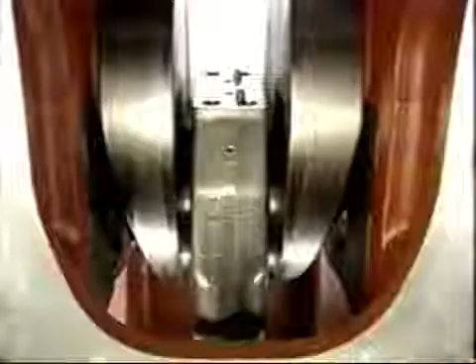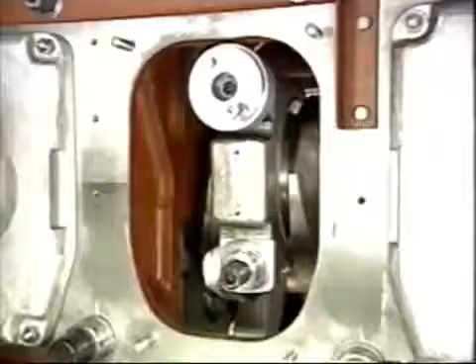Turn the crankshaft until the big end bore is at the housing inspection window and remove the pull nut.

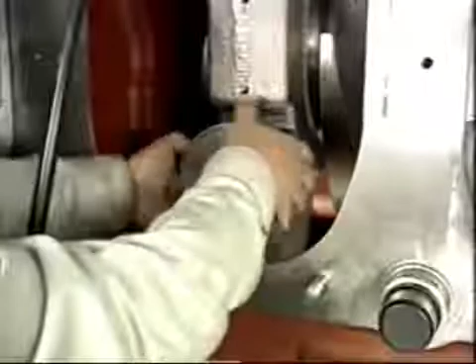Attach the jack stand and the hydraulic jack. Tighten the hydraulic jack until it's completely seated, then back the jack off one turn.

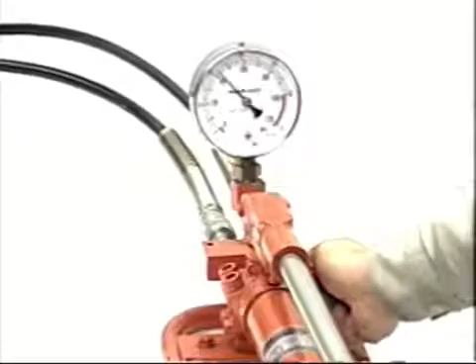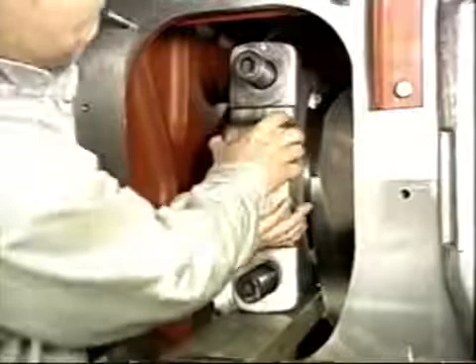Remove the hydraulic jack and turn the big end bore sideways. Turn it until it reaches the guide plate. Support the big end bore on both sides and carefully separate both sides to avoid damaging the crankshaft.

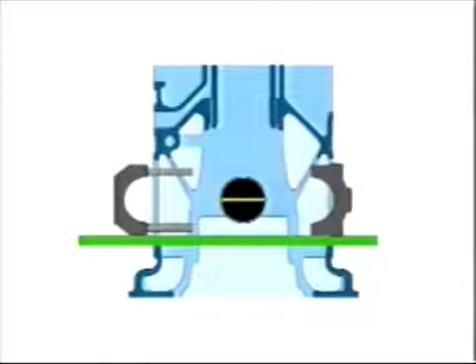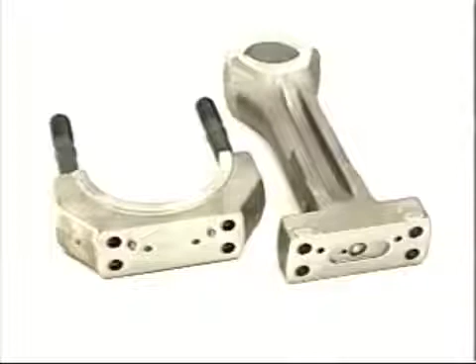Clean the crank pin bearing shell thoroughly and inspect the back surface and the joint surface of the bearing shell for fretting, traces of burning, or debris.

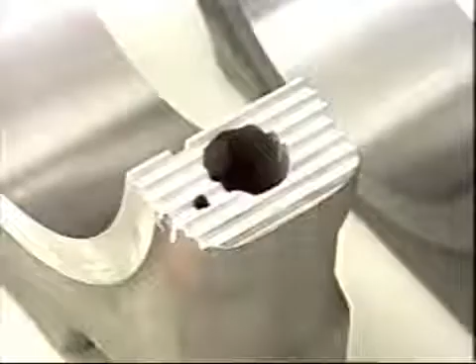Check for damage or fretting on the serrated teeth and rod part. Perform a color check on the serrated teeth to see whether there are any cracks.

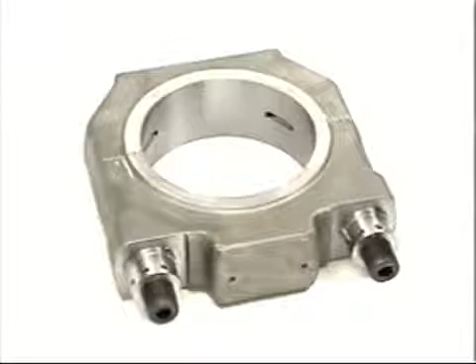Check for dents or burrs on the nut seating area and the threads and bolt seat of the crank pin bolt.

Now check the inner diameter of the big end bore.

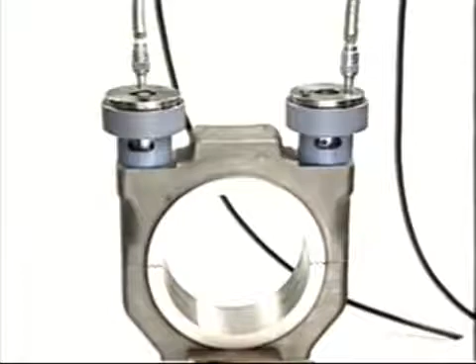Assemble the big end bore and fit nuts only after making sure that the tally marks and knock pins match perfectly.

Tighten the big end bore to the specified pressure and measure the big end bore diameter.

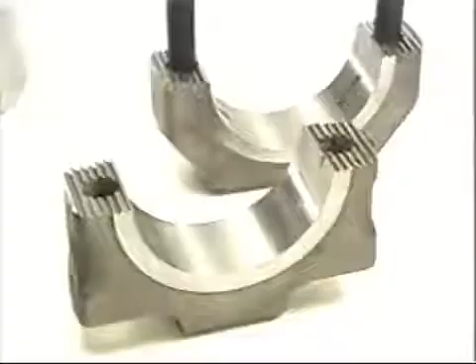Now, an explanation of the assembly procedure of the connecting rod big end bore. Match the claws and assemble the bearing shells. At this time, do not apply grease or oil to the back of the shells.

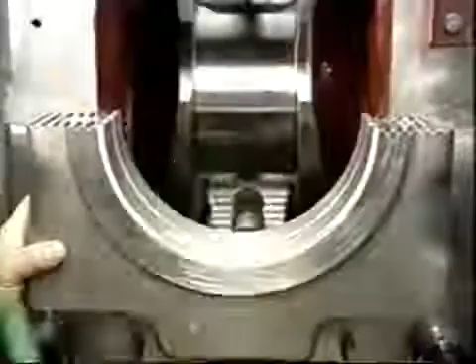Wipe the crankshaft clean and apply lubricating oil to the surface of the bearing shells.

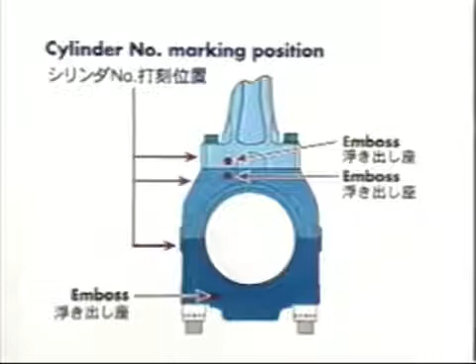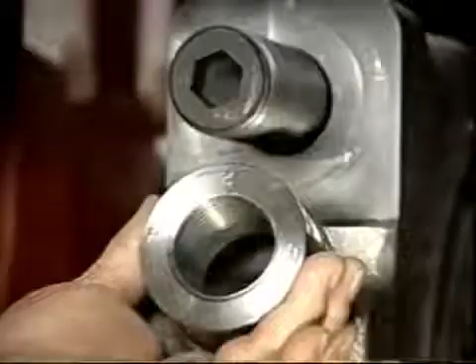Check the location of the identification mark, round embossed seat and knock pin. Face the round embossed seat toward the front of the engine and assemble the metal cap halves from both sides without scratching the crankshaft.

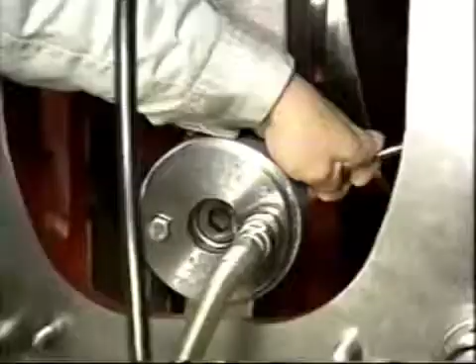The bolts and nuts are punched with numbers, so be careful not to misplace bolts when reassembling. Attach the nuts and fasten them.

Tighten the nuts to the specified pressure in the same order as when disassembling. When they're seated, secure them by tapping the jack handle with a hammer. Then attach the pull nut.

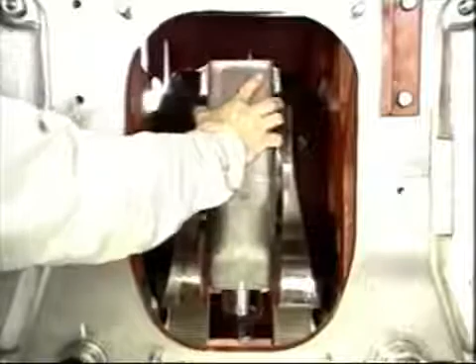Check if the big end bore turns easily on the crankshaft.

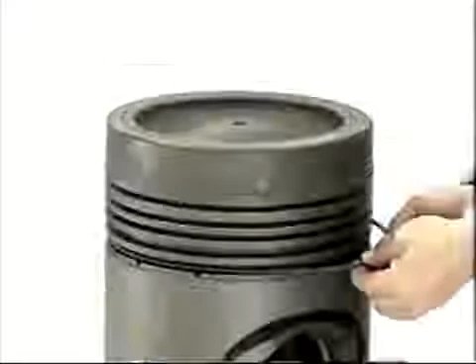Now let's assemble the piston and connecting rods. Clean and air blow each part before assembling the pistons.

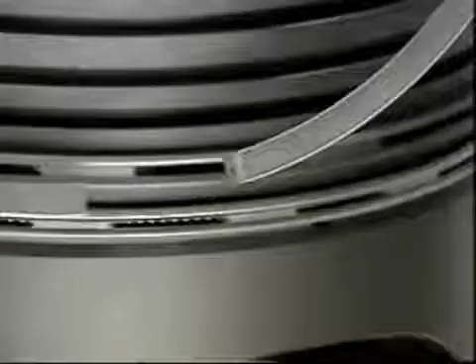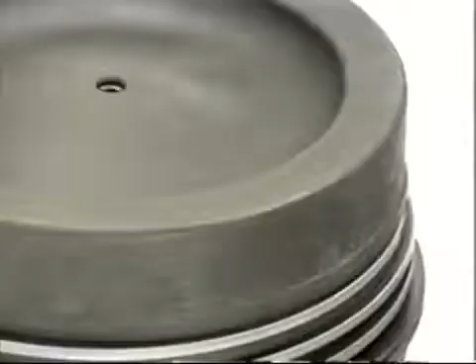Measure and record the clearance between the ring and the ring groove with a thickness gauge.

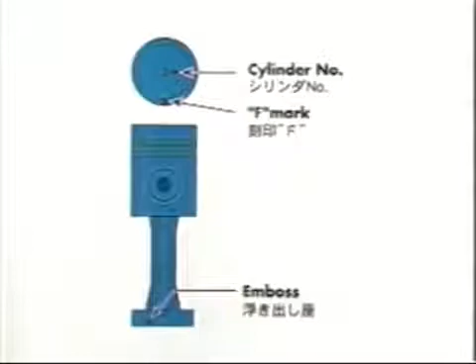When assembling the piston and connecting rod, match the F mark on the piston combustion surface to the round embossed seat on the rod part of the connecting rod.

Apply lubricating oil on the piston pin and fit the piston pin into the piston. Then fit the snap rings into the groove.

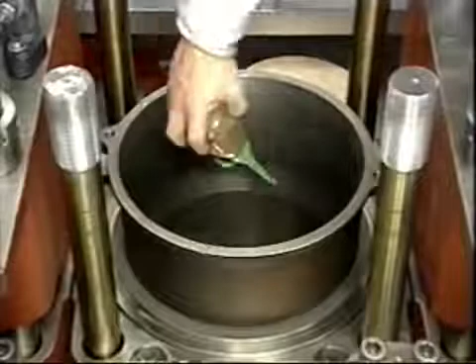Check the side clearance between the piston and the small end of the connecting rod.

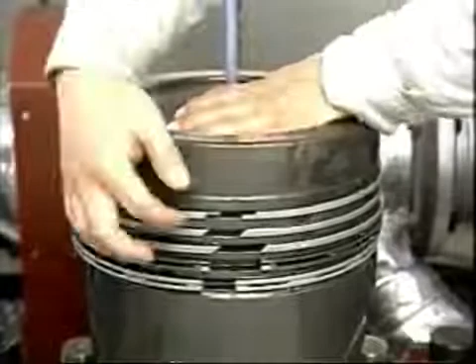Place the piston insertion ring on the top of the cylinder liner. Apply lubricating oil to the piston insertion ring, cylinder liner, piston ring, and piston skirt.

Adjust the piston ring gaps to 90-degree intervals.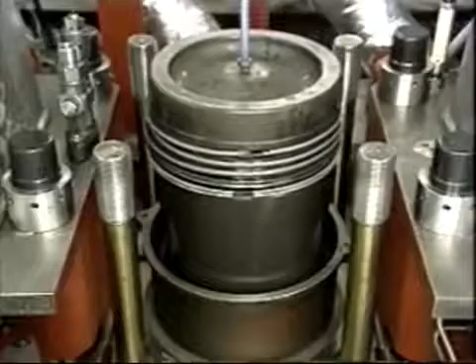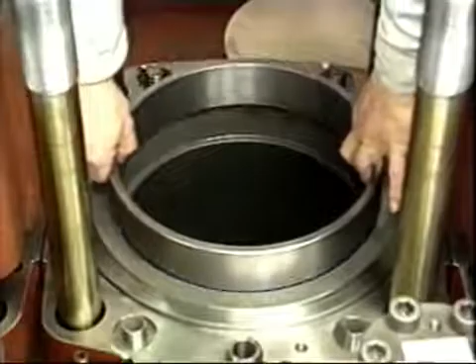Place the crank pin at bottom dead center. Then slowly insert the piston into the cylinder liner, lowering it slowly while matching the bottom of the rod part with the big end. Finally, match the knock pin.

Place the protect ring so that the identification mark can be seen from the top.

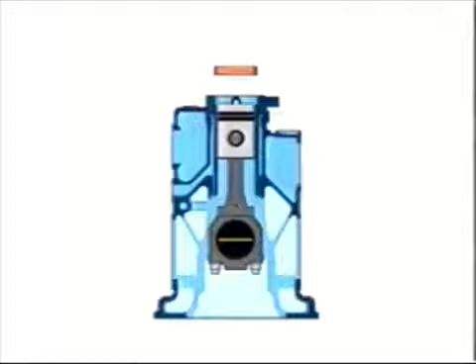Spray Molykote 1000 on the threads and seat of the connecting bolt. The connecting rod part has A and B punch marks.

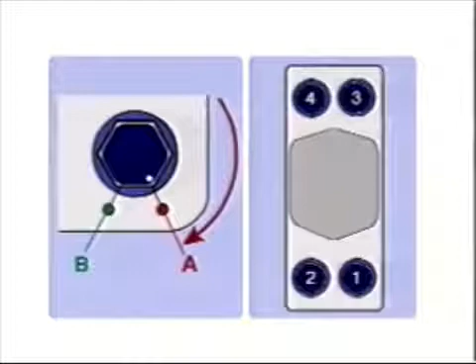Using a torque wrench, tighten to the A mark, in the order 1, 4, 2, 3.

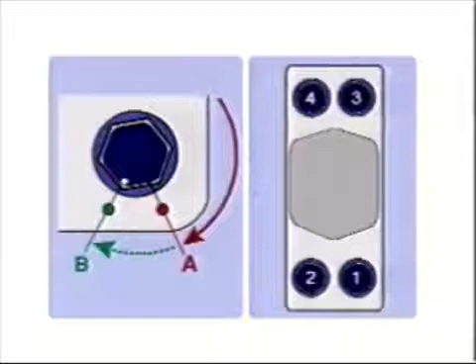Further tightening to the B mark is also done in this order: 1, 4, 2, 3.